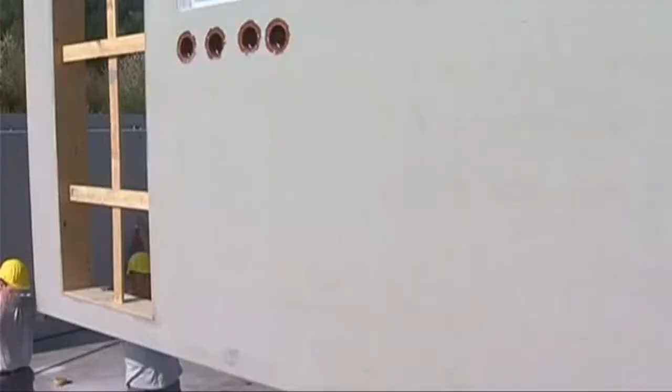Industrialized Building System (IBS) is a technique of construction whereby components are manufactured in a controlled environment, either at site or off-site, placed and assembled into construction works. Precast system is used in this case study, as this system is the most readily available system and is well known in Malaysia. It ensures high efficiency and is less time consuming in construction period.

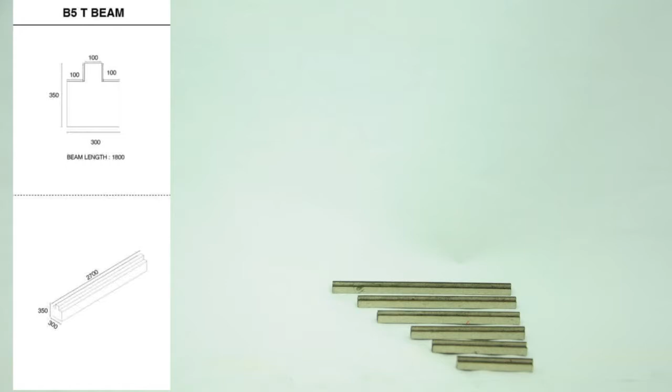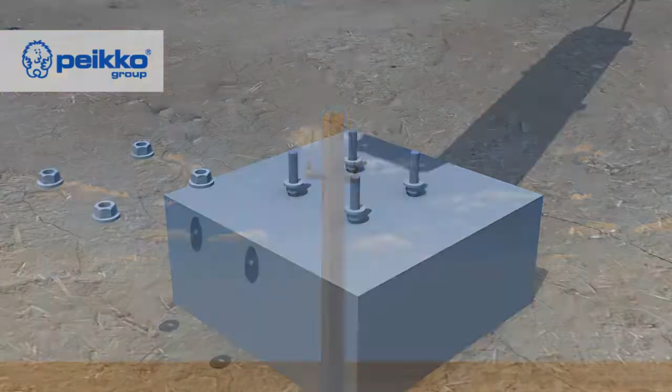Foundation. 150 x 150 mm precast concrete square piles are hammered into the earth. Pile caps are then casted on site by prefabricated steel formwork, embedding the remainder of piles. Rebar anchor bolts are casted with pile caps.

Beams. Precast ground beam is placed on top of pile caps, followed by precast ground slabs pre-manufactured with welded wire reinforcing fabric bonds.

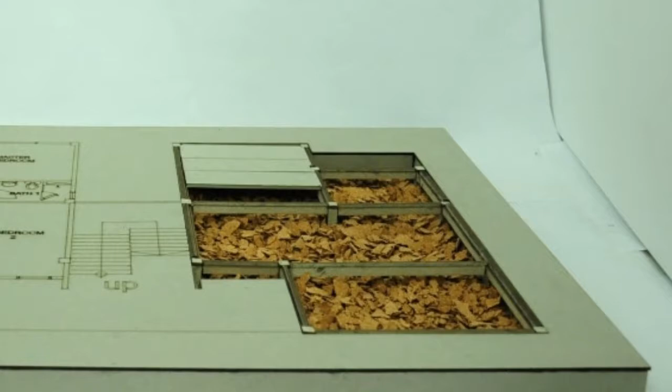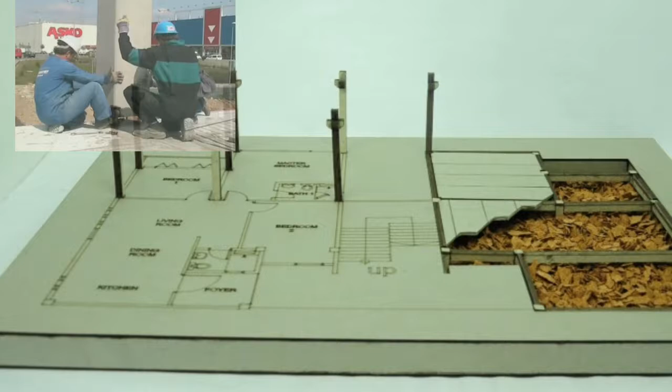Columns. Connection of column to column uses similar method as mentioned in the connection process of column stump to pile cap, through bolting of metal bearing plate to anchor bolts.

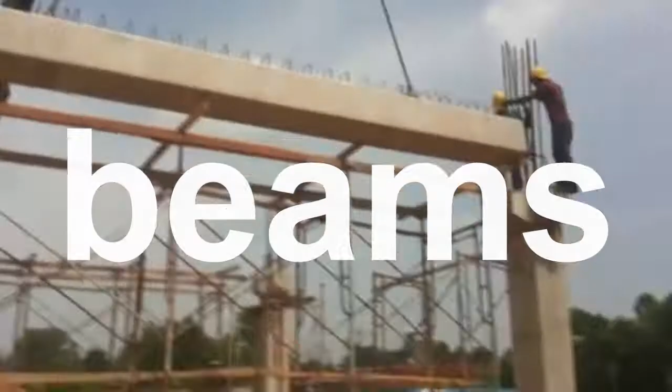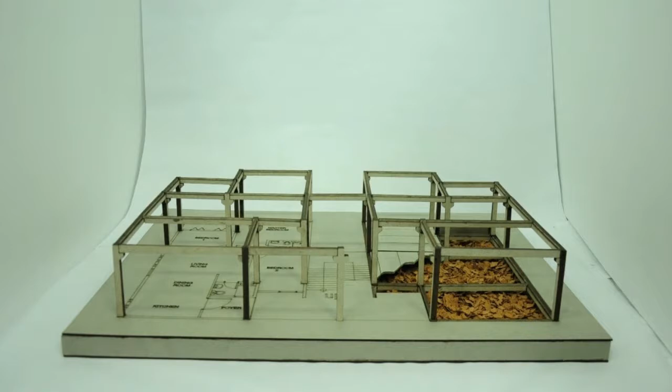Beams. Both precast beams and columns are prefabricated with metal plates casted, laying flat on where both components join. During installation, precast beams sit on metal-bearing pads on top of column corbels, where right-angle steel plates are welded to metal plates casted earlier on beams and columns. The joint is then grouted solid by high-strength cement grout.

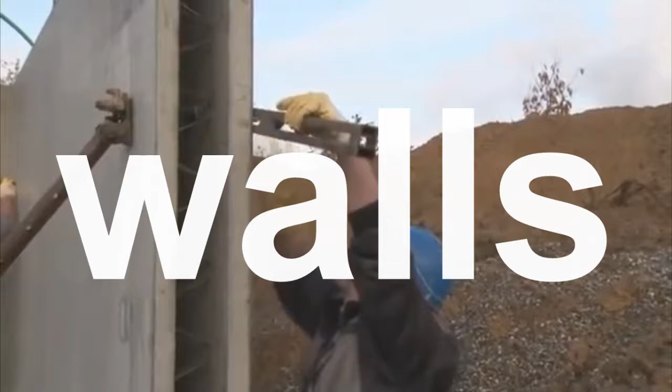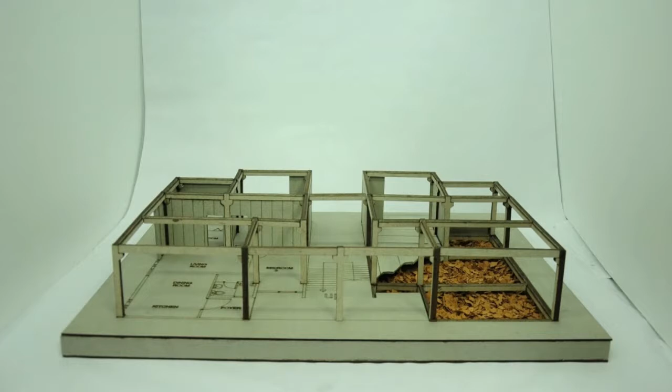Walls. The panels are lifted and positioned by cranes while vertical and horizontal alignment are checked at the same time to meet plane connection between walls. To secure wall panels with each other, loose field connector plates are bolted to embedded plates casted on the inner side of walls, then grouted with high-strength cement.

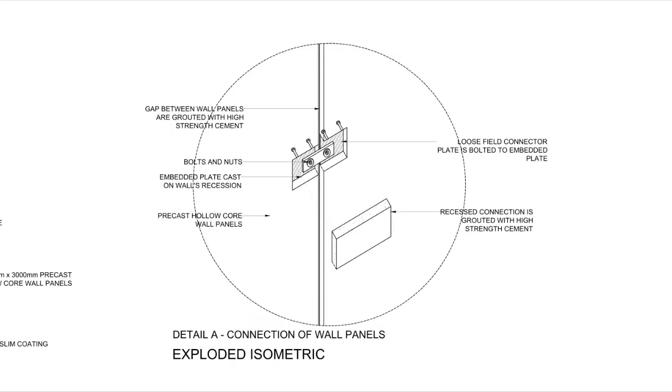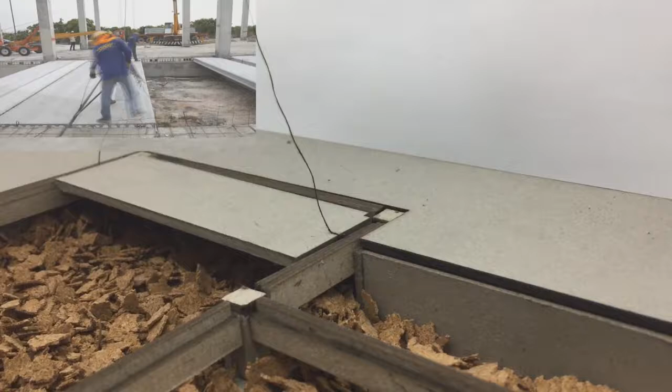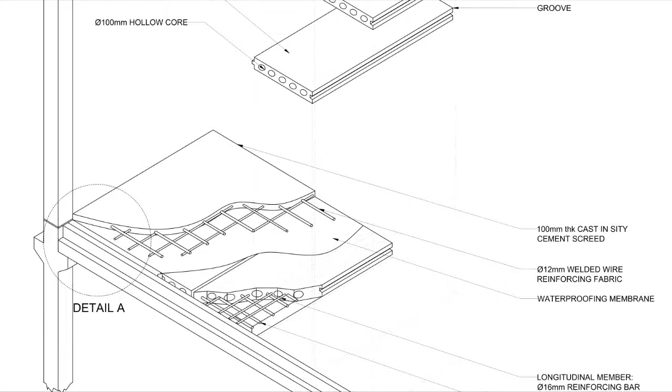Slabs. 150 mm thick hollow core precast slabs ranging from 5 different sizes are used. During the manufacturing process, it is reinforced with reinforced concrete bar of 16 mm diameter for longitudinal members, welded with reinforced concrete bar of 12 mm diameter for transverse members. The hollow core precast slabs are connected together by tongue and groove system, which are then placed on top of bearing plates.

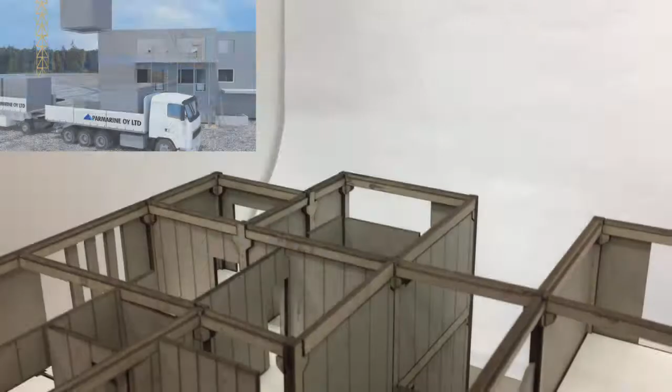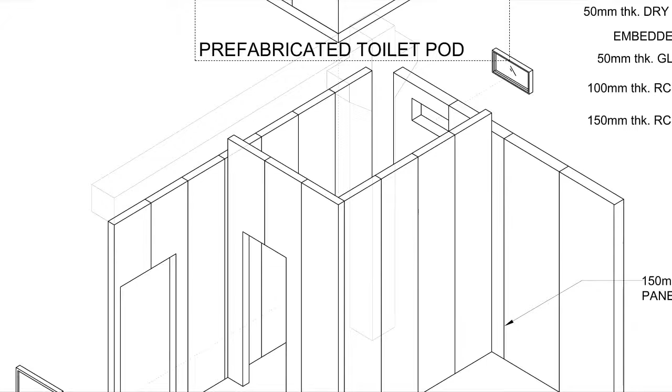Toilet pods. Toilet pods are slid in between erected precast wall panels and floor tray, grouted using high-strength cement as connection. These non-load bearing modules have relatively thin walls and floors to resist their own weight and forces during lifting. Interior of the 50 mm thick walls are cladded with marble tiles using special adhesive, whereas the floor is a 100 mm thick reinforced concrete slab.

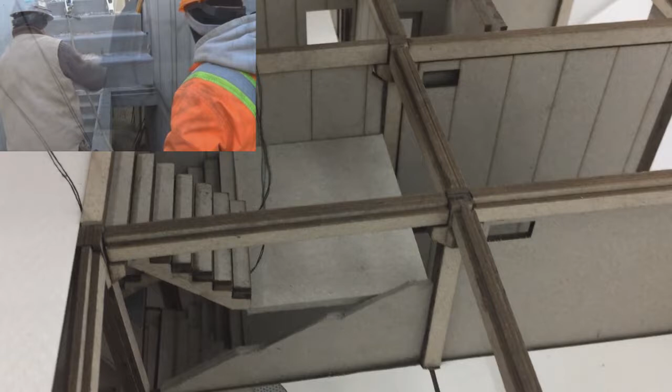Staircase. To install a precast staircase, landings are first installed by tying loop tie bar projecting from both sides of landings to R10 stirrups projecting from precast beams, reinforced by right-angle steel plates. Followed by precast lower stair flight lowered down and connected to the landing through notch connection, where right-angle steel plates are bolted to staircase support location and rested on top of landings cutouts with an M24 bolt.

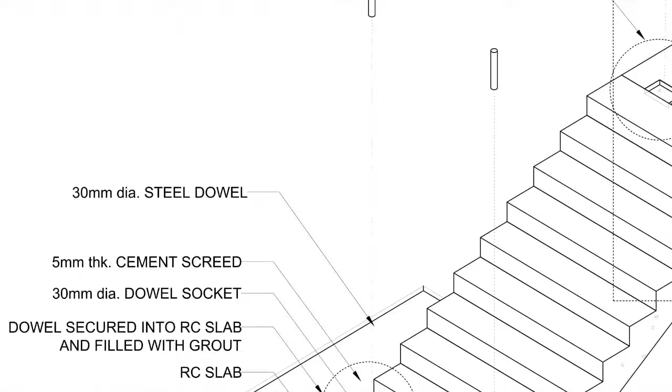The connections are then grouted for reinforcement. Then, stairs are connected to lower and upper concrete slabs using dowels, whereby shim plates are placed at both ends of staircase in order to correct leveling.

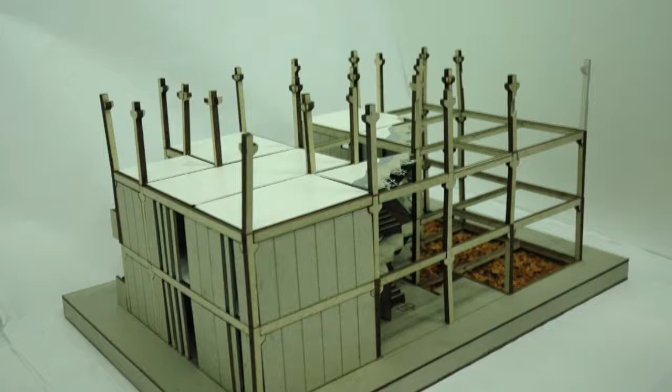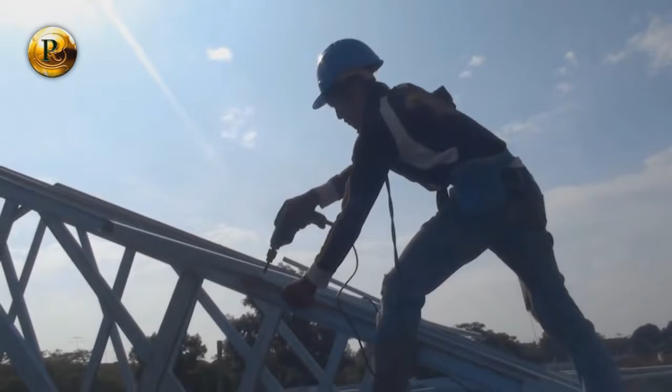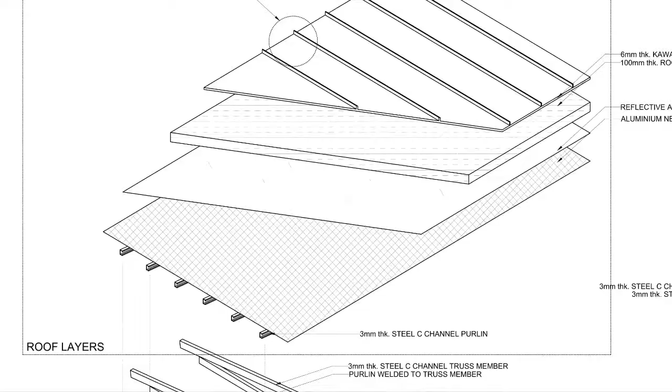Roof. Once the superstructure is completed, wall plates of 100 x 50 mm are fastened onto precast beam. Prefabricated steel truss is then connected to the wall plates via multi-nail grip, followed by C-channel purlins positioned above truss, supported by cleats, using welded connection. A layer of netting is clipped onto purlins, followed by aluminum foil to reflect thermal radiation. Rock wools are then placed, functioning as sound and thermal insulation before covering with corrugated metal deck as the finishing layer.

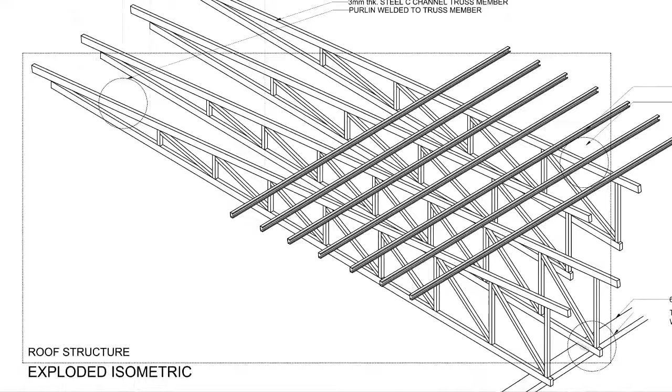By using IBS system, the reduction of unskilled workers and better quality control creates a safer and more organized construction site. With a more systematic construction process, construction time is reduced efficiently, leading towards considerable cost savings due to the reduction of workers on site and faster project completion.